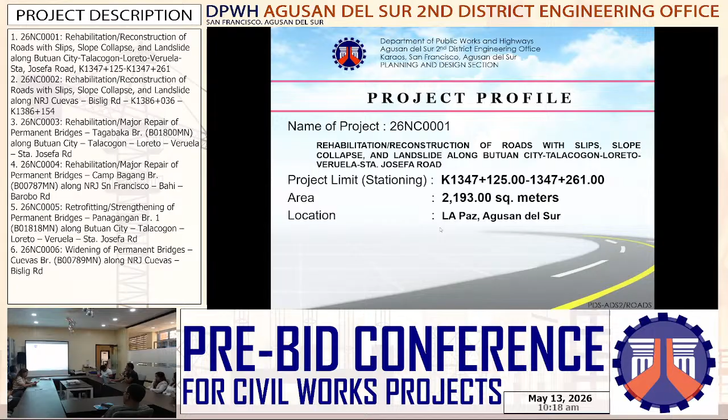It has an appropriation of 31,724,000 with an ABC of 31,089,520 pesos, with a total of 288 calendar days. Classification: slope protection, source of funds for 2026.

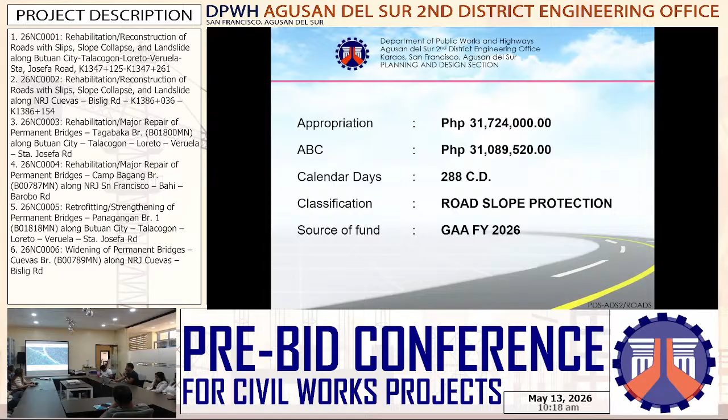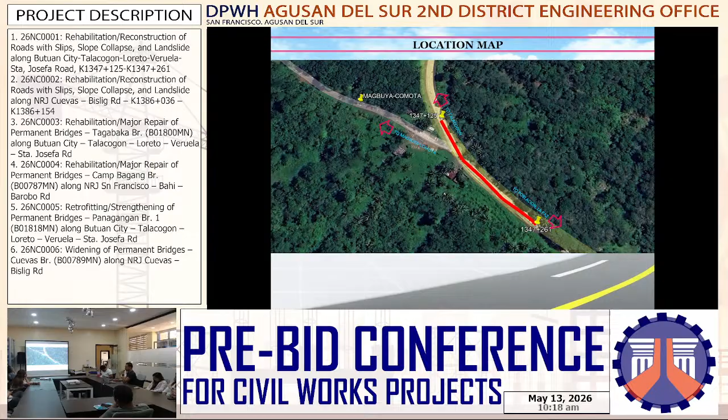So this is the location of the project. This way is leading to Talacogon and this way is to Poblacion La Paz. And this junction is to Magbuya-Comota.

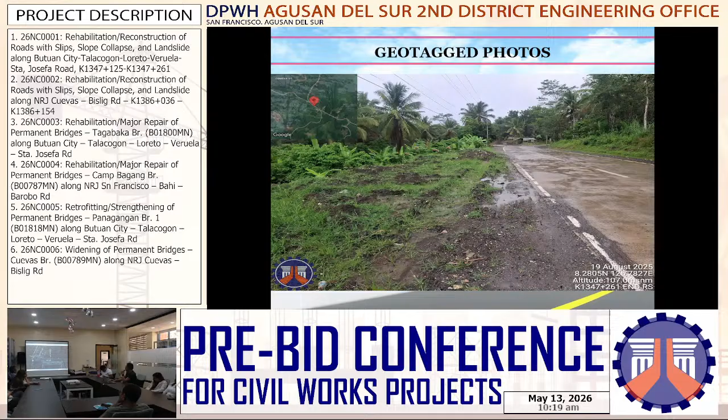These are the geotagged photos. So for the plan and profile, we have two sections. First section is at 1347 plus 125, the location is a one-berm slope protection, and it will end at 1347 plus 177.55. For the second location, the two-berm slope protection will be from 1347 plus 180 to 1347 plus 260.

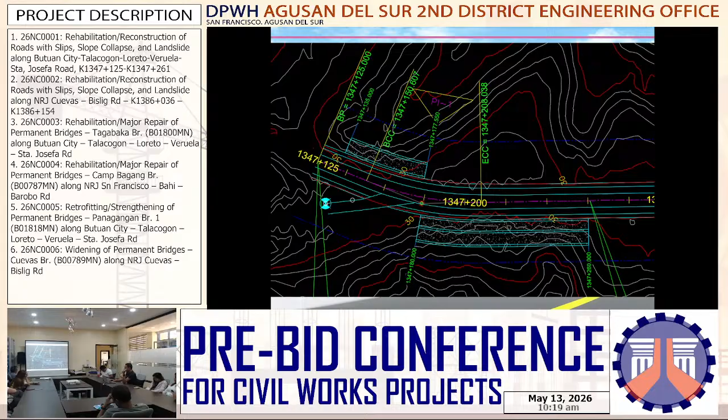So this is the typical section for reinforced concrete slope protection. We have the existing carriageway and the location of our slope protection at the left side will be offset at a distance of 5.35 meters away from the existing carriageway. So we are using reinforced concrete slope protection in this area.

We don't introduce steel sheet piles in this area, so we only have footing, for two berms with steel sheet piles for protection. It is offset at 5.35, and we're using U-piles with a length of 12 meters. These are the four sections.

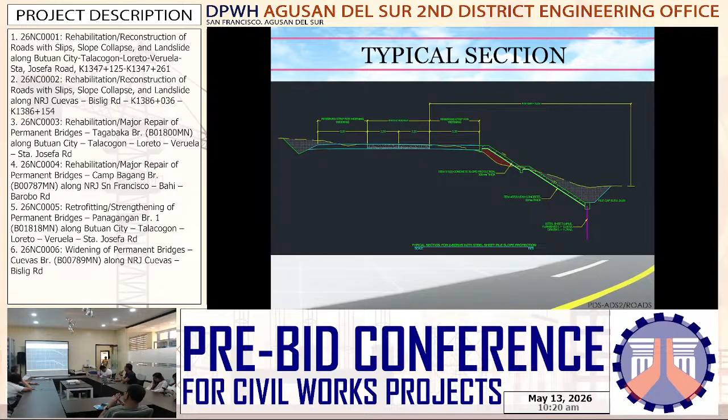So for the program of works, facilities for the engineer: construction of field office for the engineer, 1 lump sum. Provision of furniture, fixtures, equipment, and appliances for the field office for the engineer, 1. Under this item is 1 unit of desktop computer for administrative use, and a multi-function A4 printer.

Other general requirements: construction survey and staking, 0.136 kilometers; project billboard/signboard, 4 each; occupational safety and health program, 1; traffic management, 1 lump sum; mobilization and demobilization, 1 lump sum.

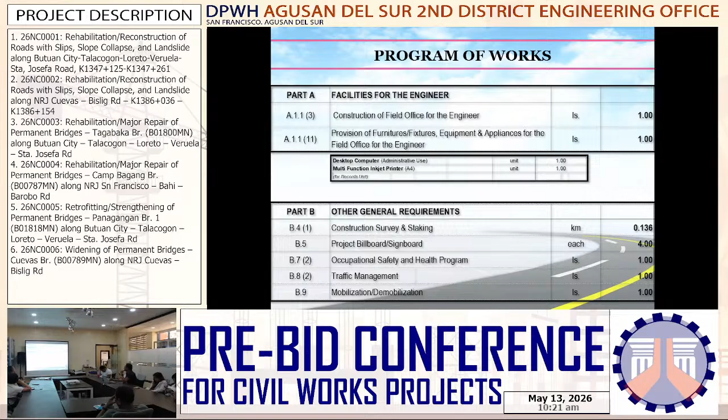For earthworks: surplus common excavation, 1,333.84 cubic meters; embankment from roadway/structure excavation, 429.9 cubic meters. Drainage and slope protection structures: structural steel sheet piles, furnish 2,400 meters, driven 2,340 meters. For reinforcing steel, 2,602.78 kilograms; structural concrete 20.68 megapascal Class A, 49.28 cubic meters.

And for the lean concrete, 63.16; concrete slope protection, 459.49 cubic meters. For miscellaneous structures, reflectorized thermoplastic pavement markings, white, 34.4 square meters.

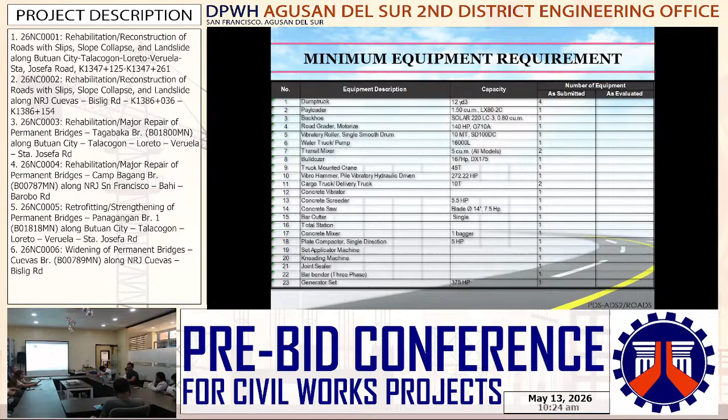So contract ID 26NC0003.

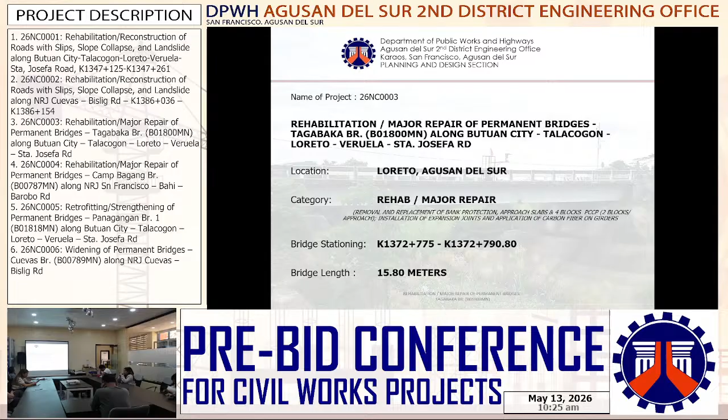Bridge stationing, kilometer 1372 plus 775 to kilometer 1372 plus 790.8, with bridge length 15.8 meters. Bridge type RCDG, number of span 1. Appropriation 7,840,000 pesos, with an ABC of 7,683,200 pesos. Project duration 106 calendar days. Source of fund GAA FY 2026 under Fisaro Schedule 1.

So for the bridge profile, Tagabaka Bridge was constructed in year 2015. The existing bridge has served the public for 11 years. For the location map of Tagabaka Bridge, this direction is going to Poblacion, Loreto, while this way is going to Binucayan, Loreto, and this direction is going to La Paz.

For the geotag, there are actual photos on site. We have here the beginning of the project and the end of the project. For the condition on site, as per latest BMS assessment, it has been observed that there's a settlement at abutment A with depth of 0.4 meters and abutment B, 0.15 meters. And also there's material loss on each side of abutments A and B, and there's honeycomb on girders near the abutment.

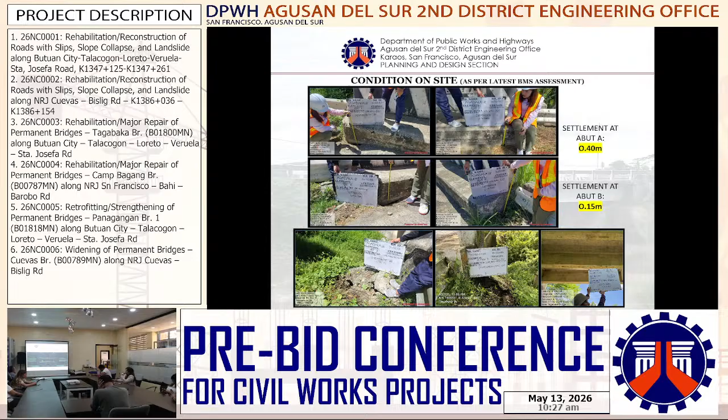So for the general plan of Tagabaka Bridge, part of this project is the removal and replacement of approach slabs A and B, and also there's an embankment underneath for the settlement issue. Then we also have the removal and replacement of PCCP, 6.7 by 4.5, also with embankment for approach A and B. We also have the installation of expansion joint finger type for A and B.

And under the bridge, we have the removal and replacement of damaged bank protection, 0.3 meter thick, with lean concrete 0.10 meter thick, 9 meters each side, or 18 meters per abutment. Note that all RSB from damaged structures subject for replacement will be turned over to the implementing office.

For the general elevation of Tagabaka Bridge, we have the installation of expansion joint finger type at A and B, removal and replacement of approach slabs A and B, PCCP 6.7 by 4.5 with embankment for settlement, carbon fiber sheet at both ends of girders, removal and replacement of damaged bank protection, and note this portion is the RC bank protection covering the abutment.

Be reminded that the RSB from damaged structures subject for replacement will be turned over to the implementing office.

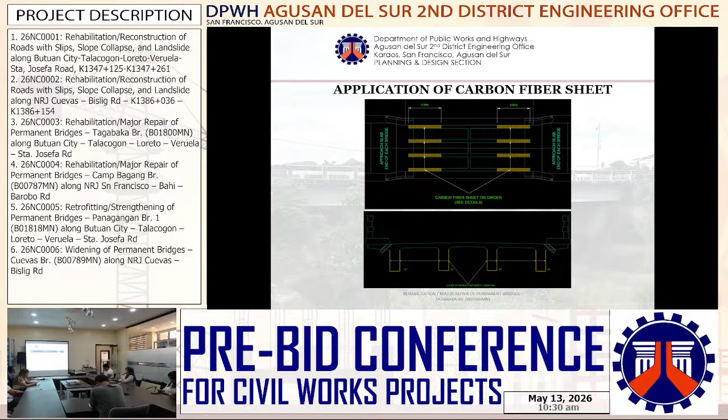For the program of work of Tagabaka Bridge: Part A, facilities for the engineer, provision of field office for the engineer on rental basis or bunkhouse rental, 4 months. Part B, other general requirements: bridge survey and staking 1 lump sum, project billboard and signboard 4 each, occupational safety and health program 1 lump sum, traffic management 1 lump sum, mobilization/demobilization 1 lump sum.

For Part C, earthwork: clearing and grubbing 0.144 hectares, removal of actual structure and obstruction 0.28 meter thick PCCP unreinforced, this is for the existing unreinforced PCCP, 60.3 square meters. For removal of actual structure and obstruction 0.3 meter thick or our existing approach slabs, 80 square meters.

For removal of structure and obstruction concrete, this is from the damaged bank protection, 64.8 cubic meters. For the embankment from borrow, common soil, this is for the settlement under the PCCP and also the access road leading to the bottom under the bridge, we have 307.24 cubic meters.

For Part D, sub-base and base course, we have item 200 under PCCP, 30.4 cubic meters. For Part E, surface courses, PCCP unreinforced 0.28 meter thick, 60.3 square meters; for PCCP 0.3 meter thick, 80 square meters.

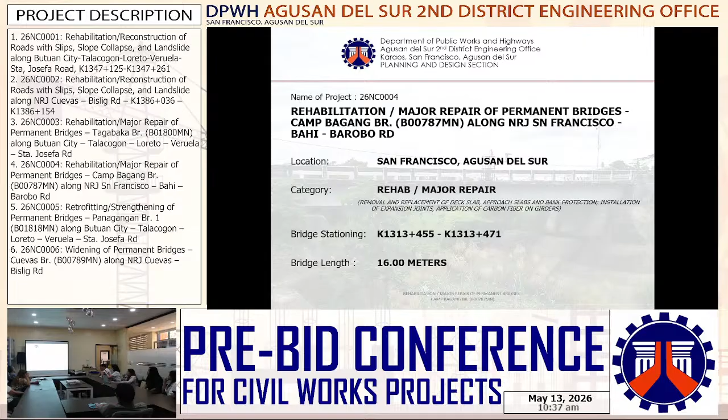Bridge length of 16 meters. Bridge type RCDG, number of span 1, appropriation 9.8 million, ABC of 9,604,000 pesos. Project duration of 109 calendar days. Source of fund, GAA FY 2026 under Fisaro Schedule 1.

For the bridge profile of Camp Bagang Bridge, it was constructed in 1981, repaired and rehabilitated in 2014 by the maintenance section, and widened under GAA 2025 at both sides. So the existing bridge has served the public for 45 years already.

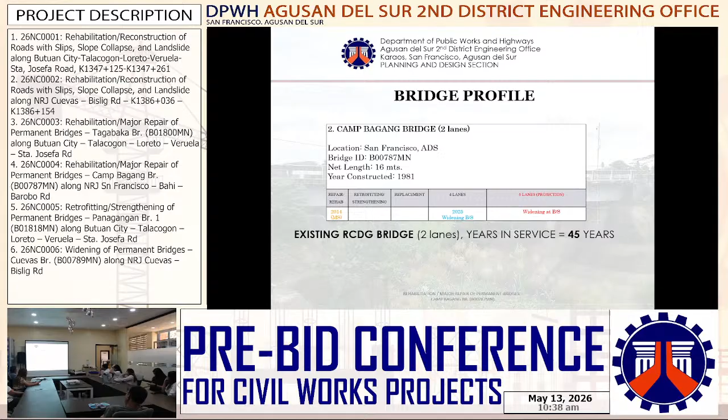For the location map, this is the Camp Bagang Bridge. This way is going to Barobo and this way is going to SF Rotonda. This is SF Rotonda.

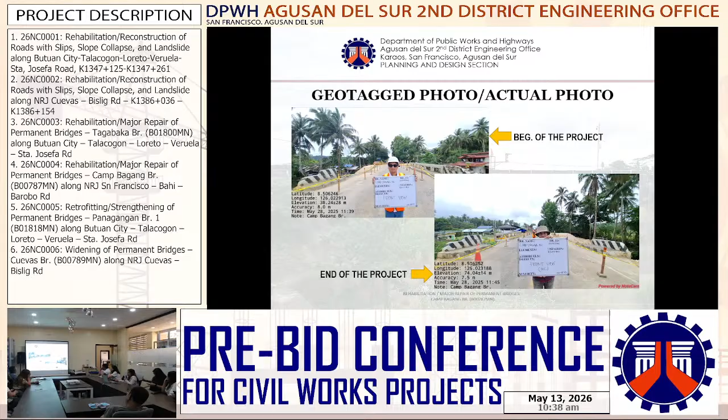For the geotag photo and actual photo on site, this is the beginning of the project and the end of the project. For the condition on site, as per latest BMS assessment, it has been observed that there's scaling in the approach slabs and also deteriorated sealant at abutments, expansion joint water leakage, damaged bank protection, scaling at the whole deck, and bar exposure at G1 near the abutment.

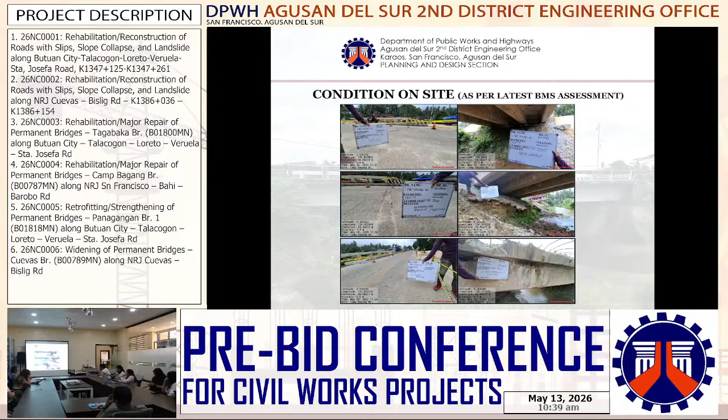So for the general plan of Camp Bagang Bridge, part of this project is the removal and replacement of the whole deck and also the approach slabs A and B, installation of expansion joint at A and B, and we have under the bridge RC bank protection of 0.3 meter thick with lean concrete 0.10 meter thick, RC footing 0.4 by 1.5. Distance covered is 8.5 at A and B - this is just the gap in between the widened left and right side.

For the general elevation of Camp Bagang Bridge, note that the post railings and sidewalks of the existing two lanes, or the inner lanes, were already removed as part of the FY 2025 widening of the bridge at both sides. So for the rehab, we have removal and replacement of deck slab of the inner lanes only, then application of carbon fiber wrapped on our girders at both ends.

Then we have the installation of expansion joint, finger type, at A and B, then removal and replacement also of the approach slabs A and B. Then under the bridge we have the RC bank protection to the inner lanes, 0.3 meter thick with lean concrete 0.10 meter thick. Note: all RSB from damaged structures subject for replacement will be turned over to the implementing office.

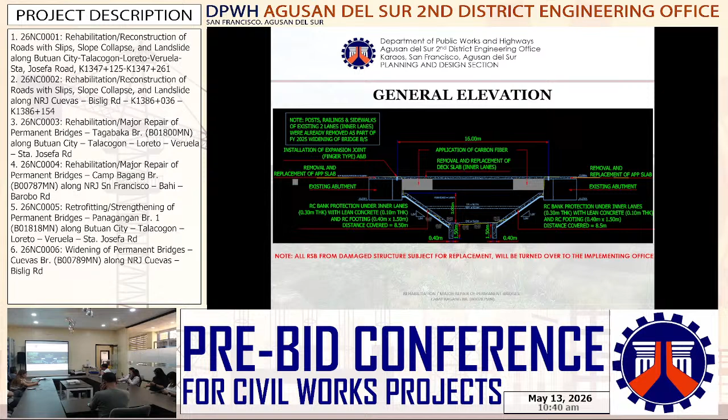For the bank protection details, we have RC bank protection 0.3 meter thick, lean concrete 0.10 meter thick with weep holes, RC footing of 1.5 by 0.4, altitude of 3 meters, ratio of 1:1.5.

For the RSB schedule, we have 16 mm diameter for the horizontal bars, spaced at 0.4, and for the vertical bars we have 12 mm diameter. For the RC footing, we have 10 pieces, 16 mm diameter for the horizontal bars, and 12 mm diameter for the vertical bars, spaced at 0.4. Note 50 mm concrete cover. So distance covered of the bank protection is 8.5 per abutment.

Part of this project is also the installation of transverse expansion joint at A and B, specifically installed in between the approach slab and the deck slab.

So for the approach slab, this is the 4 lanes orientation. This is the widened approach slab under GAA FY 2025. So we will just remove and replace the inner approach slabs.

We also have the application of carbon fiber - carbon fiber sheet, 2 layers, wrapped on girders at both ends with length of 3.8.

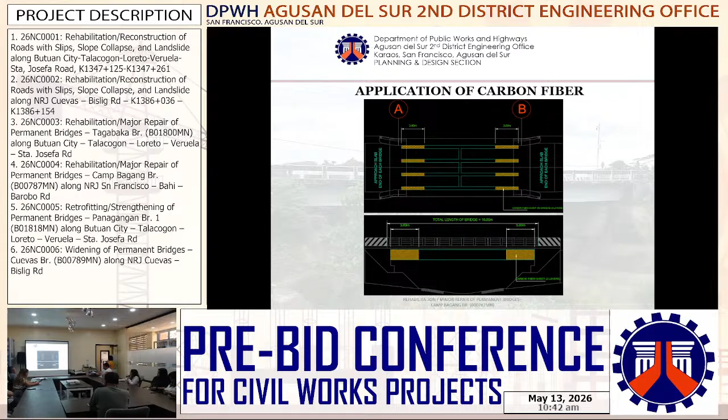This is the girder, wrapped in 2 layers of carbon fiber sheet, 1.2 mm thick, length of 3.8.

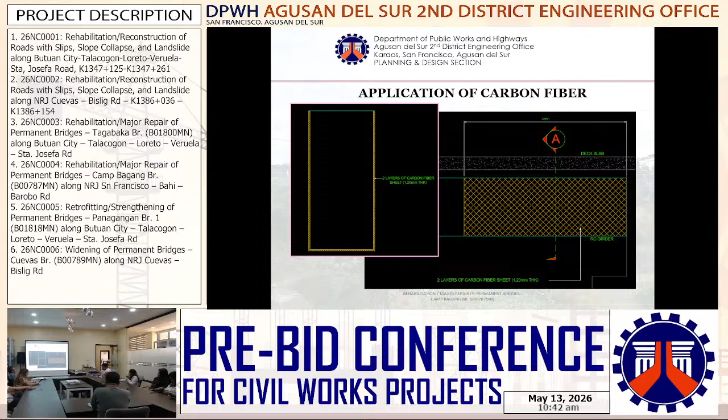So for the program of work of Camp Bagang Bridge, we have Part A, facilities for the engineer: provision of field office for the engineer, rental basis or bunkhouse rental, 4 months. For Part B, we have bridge surveillance 1 lump sum, project billboard and signboard for each, occupational safety and health program 1 lump sum, traffic management 1 lump sum, and mobilization 1 lump sum.

For Part C, earthwork, we have removal of actual structures and obstruction, 0.3 meter thick PCCP reinforced, 80 square meters. For removal of structures and obstruction concrete, this is for the deck slab and damaged bank protection, 35.42 cubic meters. For the embankment from borrow, common soil, this is under the bridge for bank protection and also the transition for detour purposes.

1,167.4 cubic meters. And for Part D, sub-base and base course, we have item 200. This is under approach slabs and the detour surfacing, 96 cubic meters. And for surface courses, we have PCCP 0.3 meter thick, 80 square meters.

For Part F, we have reinforcing steel grade 40, this is for the deck slab and RC footing, 472.94 kilograms. For reinforcing steel grade 60, for the deck slab, we have 13,899.54 kilograms. For the structural concrete, 20.68 MPa, we have 10.2 cubic meters.

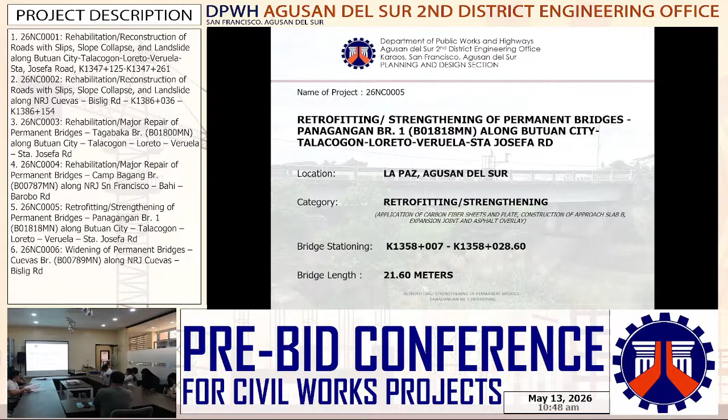With specifics: application of carbon fiber sheets and plate, construction of approach slab B, expansion joint, and asphalt overlay. Bridge stationing, kilometer 1358 plus 007 to 028.6. Bridge length, 21.6 meters. Bridge type, PCDG, number of span 1, appropriation 9.8 million, ABC of 9,604,000 pesos. For the project duration, we have 109 calendar days.

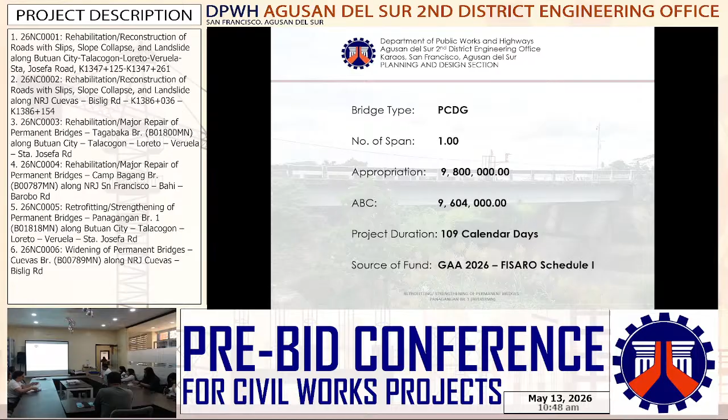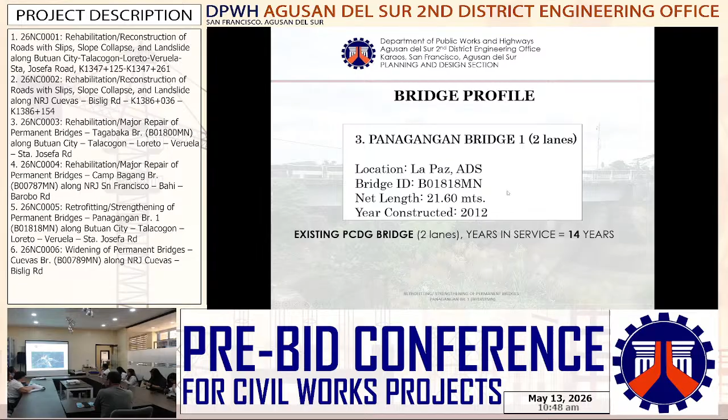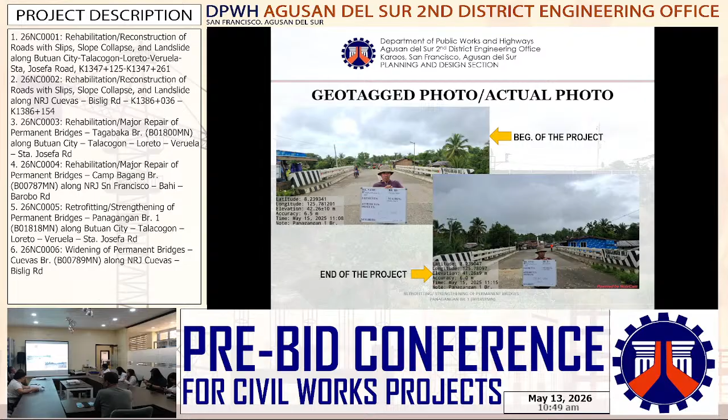For the geotagged photo or actual photo on site, the beginning of the project and the end of the project. For the condition on site, as per latest BMS assessment, it has been observed that there's scaling for the whole deck, there's no approach slab at abutment B, and there's honeycomb on inner girders.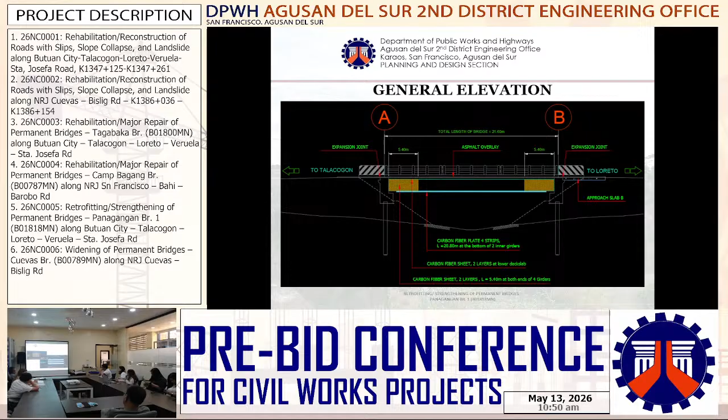So for the carbon fiber again, we have here the carbon fiber sheet 2 layers at the bottom of the deck slab in grid form. So here's the detail. For the longitudinal, 200 mm by 20,800 mm by 1.2 mm thick, this portion. Then for the transverse, we have 200 mm by 1,200 mm by 1.2 mm thick, this.

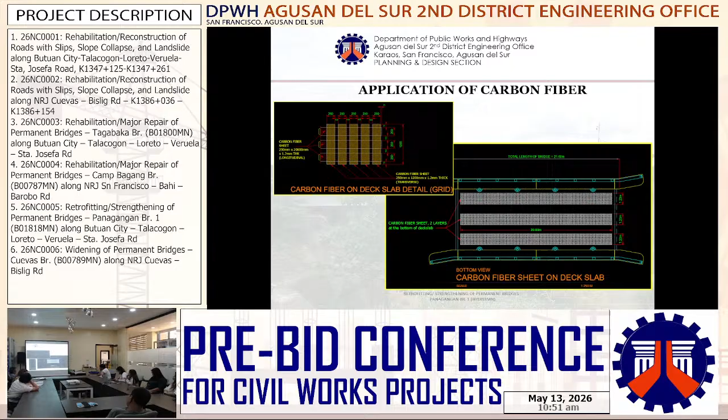Again, from the previous slide, the deck slab in grid form na carbon fiber sheet. Also, we have the 2 layers carbon fiber sheet on girders at both ends. Then we also have the 4 strips carbon fiber plate for inner girders only.

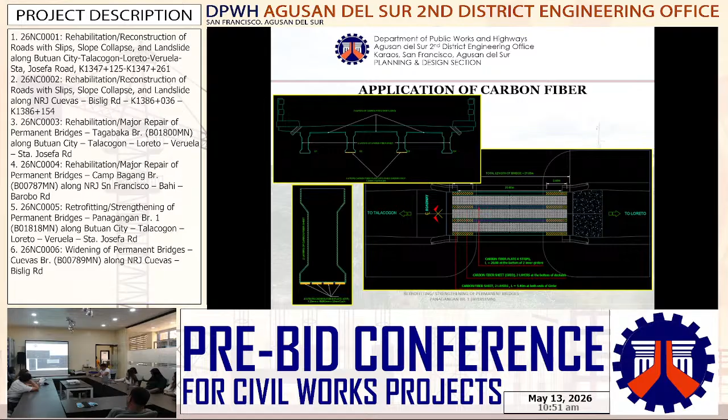So part of this project also we have the transverse expansion joint finger type at A and B.

So for the program of work, Part A, facilities for the engineer: provision of field office for the engineer on rental basis, the bunkhouse rental, 4 months. For other general requirements: bridge survey and staking, 1 lump sum; project billboard signboard, 4 each; occupational safety and health program, 1 lump sum; traffic management, 1 lump sum; move and demove, 1 lump sum.

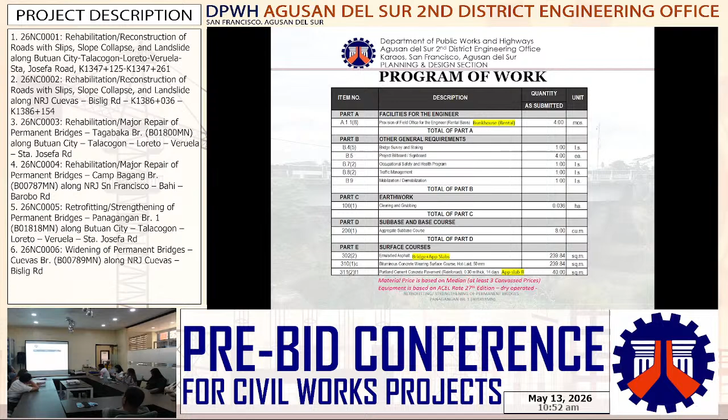For the earthwork, we have clearing and grubbing, 0.036 hectares. For the sub-base and base course, we have aggregate sub-base course, 8 cubic meters, under approach slab B. Then for the surface courses, we have emulsified asphalt, 239.84 square meters, and bituminous concrete wearing surface course hot plant mix, 50 mm, 239.84 square meters also. We also have the PCCP, 0.3 meter thick, 40 square meters.

For the bridge construction, part F, we have paint for the concrete structure, 73.79 square meters. For the expansion joint, 14.80 linear meters. We also have the forms and false work in support for the application and installation of carbon fiber, 1 lump sum. We have carbon fiber sheet 2 layers, 272.3 square meters. For the plate, we have 8.32 square meters.

For the miscellaneous structures, we have reflectorized thermoplastic pavement markings white, 6.32 square meters, and for the yellow, we have 9.48 square meters. So again, material price is based on the median of at least 3 canvassed prices.

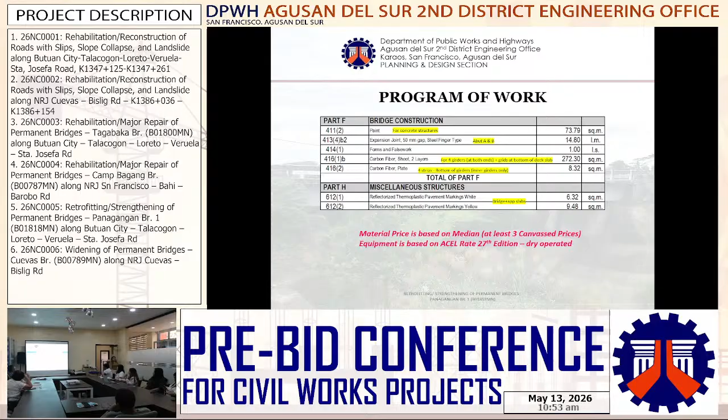Equipment rate is based on ACEL rate 27th edition. But since this is located at La Paz, it falls under dry-operated. Again, the DOE fuel price for the specific week is used. So dry-operated meaning the equipment rate is computed through dry-operated plus fuel plus lubricant.

For the quarry sources, the sand will be from Patrocinio, Santa Josefa, with hauling distance of 60 kilometers away from the project site. Our gravel crush will be from Simula River Quarry, San Ignacio, Trento, with hauling distance of 76.5 kilometers away from our project site. The cement will be from this office, 67 kilometers to our project site. The RSB will be from Davao City with hauling distance of 209 kilometers to our project site.

For the minimum equipment requirement, we have bulldozer 1, dump truck 2, payloader, vibratory roller, water truck, asphalt distributor, boom truck, asphalt paver, pneumatic tire roller, tandem steel roller, cargo truck, kneading machine, applicator machine, air compressor, generator set, grinding machine with accessories, 1 unit.

That's all, sir, for Panagangan Bridge 1. Thank you. Any questions, clarifications for retrofitting of Panagangan Bridge? Hearing none, we'll proceed to the next project.

26NC0006, widening of Cuevas Bridge.

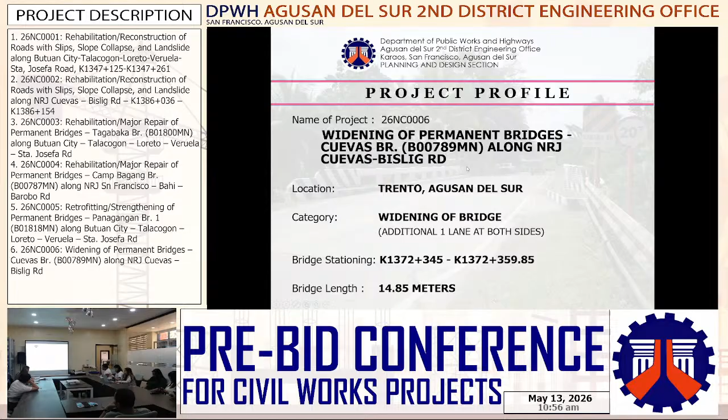Appropriation 24,173,000 pesos. For the ABC, 23,689,540 pesos. Project duration, 240 calendar days. Source of fund, again GAA 2026, under FISARO Schedule 1.

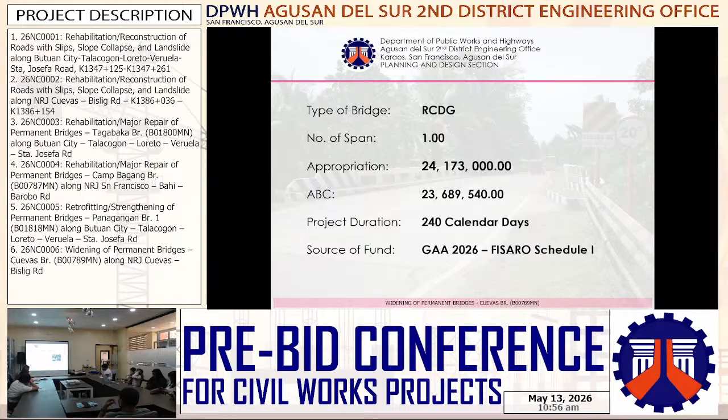Bridge profile of Cuevas Bridge: it was constructed in 1997. It was repaired and rehabilitated by the maintenance section in 2024. So it has served the public for 29 years already.

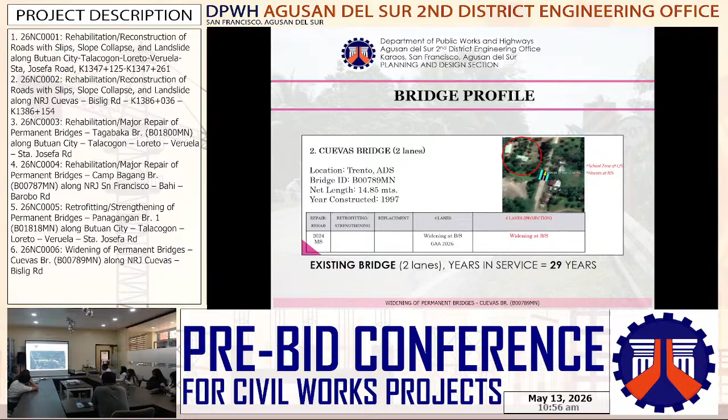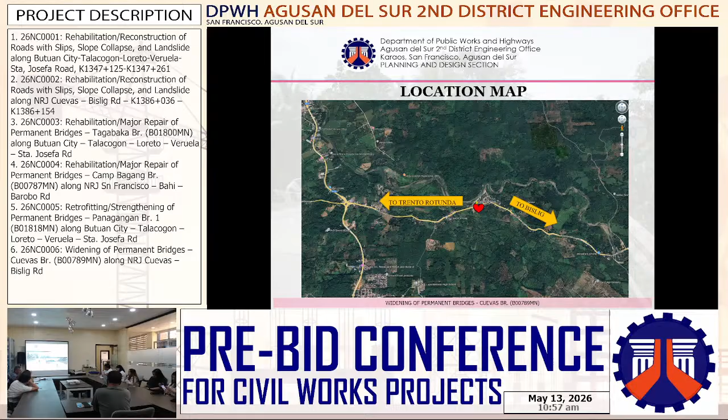For the general plan, we have here the existing RCDG bridge, the center line. So our project is widening at both sides, meaning 1 lane on the left and 1 lane at the right side.

Under the bridge, we also have the RC bank protection with SSP, length of SSP 3 meters, distance covered of 18 meters each side or 36 each abutment. We also have the transition access road leading to the construction site, also grouted riprap with end protection works.

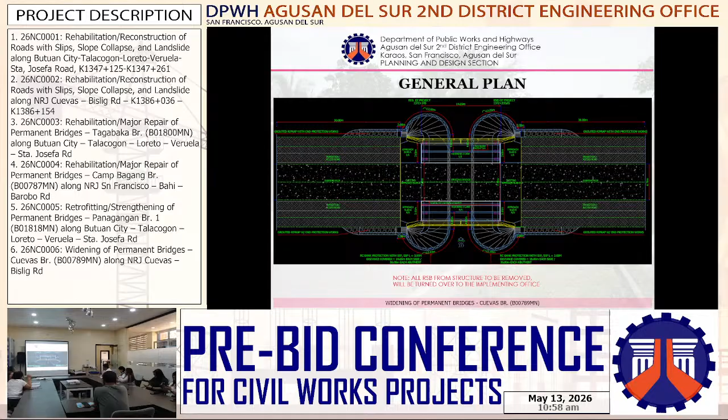For a closer look, showing you one side only at the right side: widening one lane, deck slab, the approach slab. Then under the bridge, we have the RC bank protection.

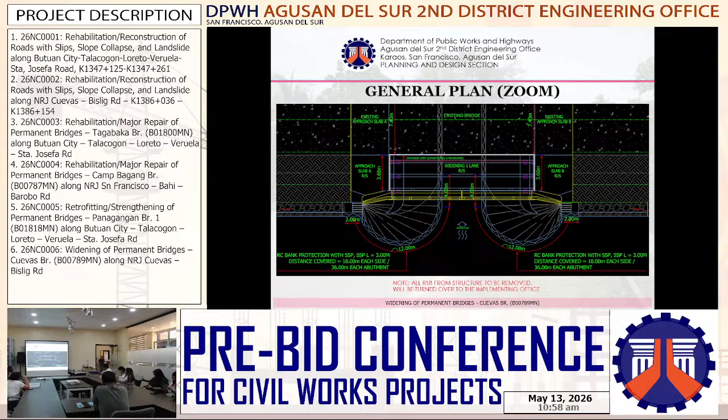For the general elevation of Cuevas Bridge, we have here the bridge with length of 14.85 meters. At abutment A, we will drive precast concrete pile, 400 by 400 mm, length of 20 meters, number of piles to be driven 12 pieces, with actual capacity of 1,463 kilonewton. At abutment B, same size but length of 18 meters, number of piles also 12 pieces.

And actual capacity of 1,732 kilonewton. Under the bridge, we have the RC bank protection with driven SSP, length of steel sheet pile 3 meters, distance covered 18 each side or 36 meters per abutment. Note that all RSB from structure to be removed will be turned over to the implementing office.

We also have the transition leading to this side for the widening, 30 meters.

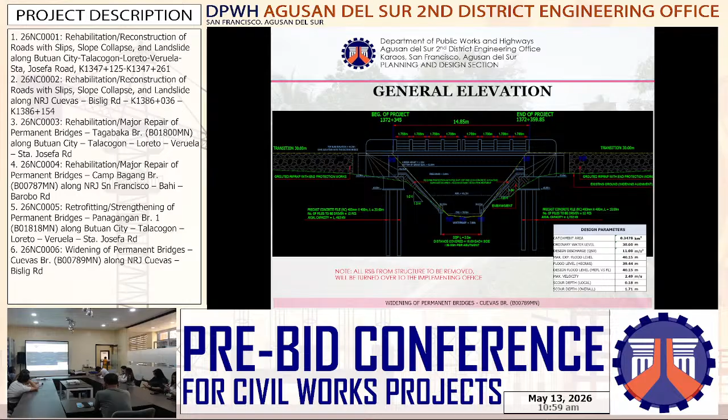For the typical cross-section, we have here the existing abutment, and this is our proposed abutments, widened at both sides. Embankment and grouted riprap as protection.

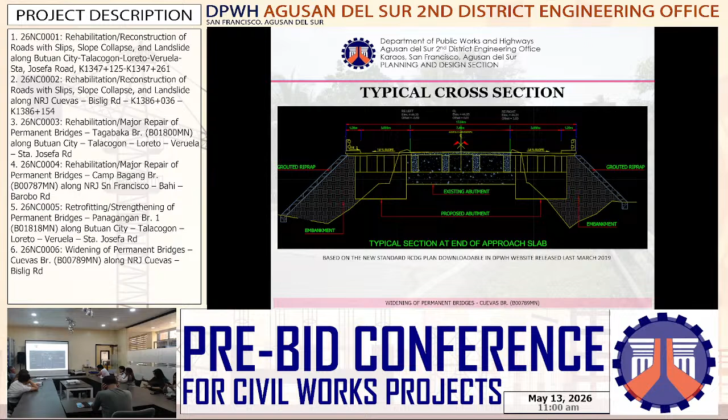For the section view of the foundation layout, we have here the existing abutment, then existing driven piles. This portion is to be chipped off. Then we will drive the RC pile for the widening, spaced at 1.0.

Then at the top, we have the girders, RCDG, 3 spaces at 1.45 or 1,450 mm. So this is the existing one lane portion, then this is the widening at one lane, one side only.

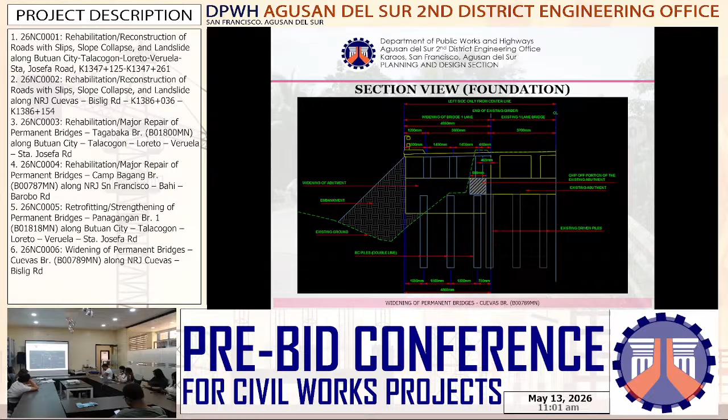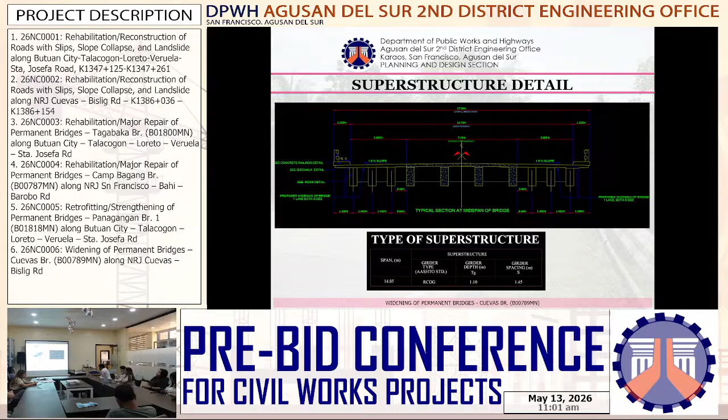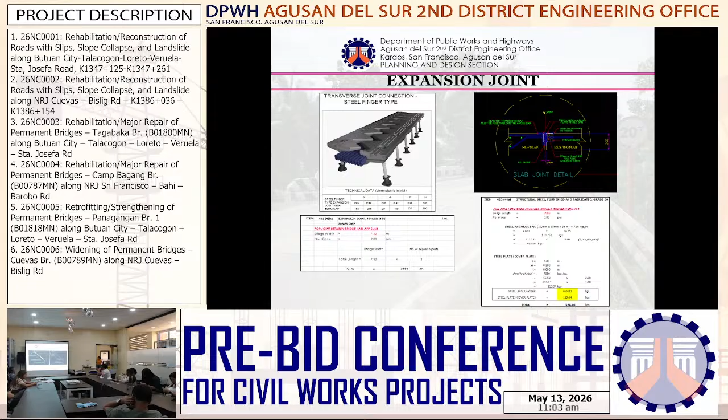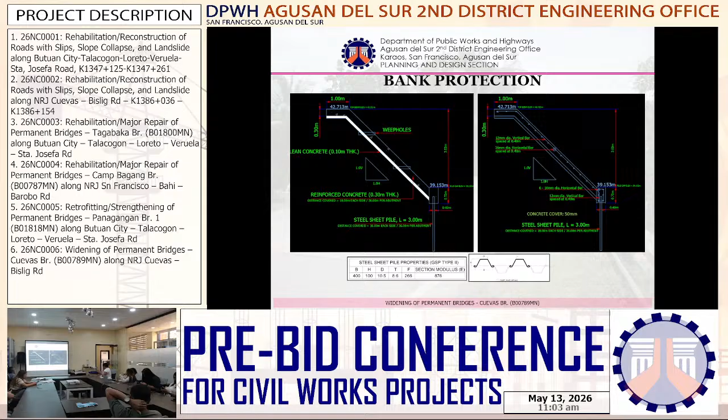For the RSB schedule, we have 12 mm diameter for the vertical bars, spaced at 0.4, and 16 mm diameter for the horizontal bars. For the pile cap, 6 pieces, 16 mm diameter horizontal bar, and 12 mm diameter vertical bar, spaced at 0.4. Steel sheet pile again 3 meters, distance covered for the bank protection is 18 meters each side or 36 meters per abutment. For the steel sheet pile properties, type 2.

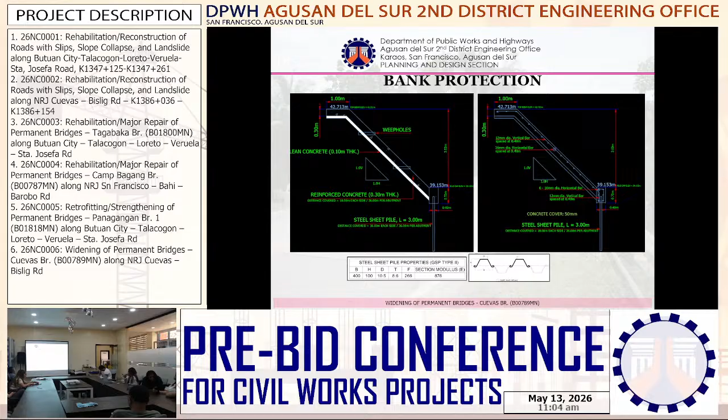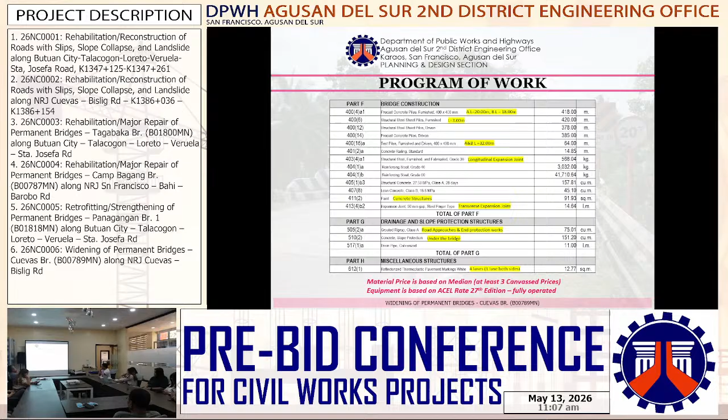For the miscellaneous structures, reflectorized thermoplastic pavement markings, 12.77 square meters. So for this project, since this is located at Trento, nearest to Trento under DOE is San Francisco, so this will fall under fully operated.

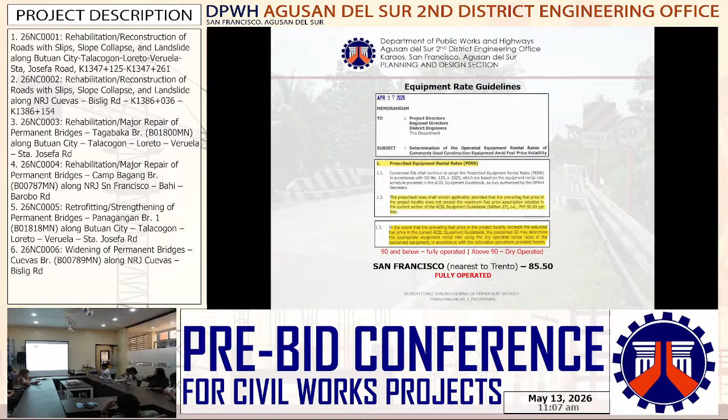So San Francisco rate is 85.50, so below 90 pesos, fully operated.

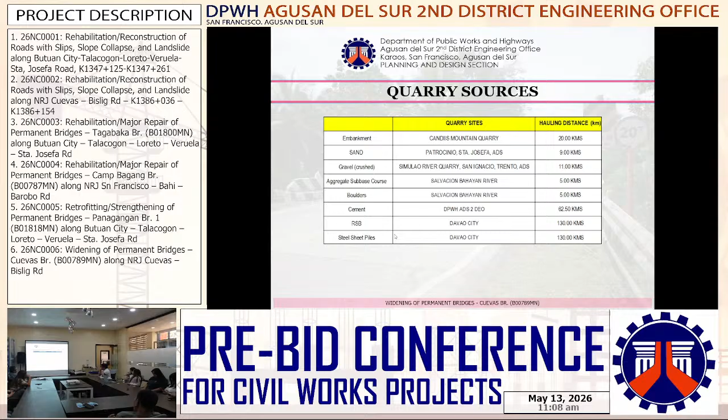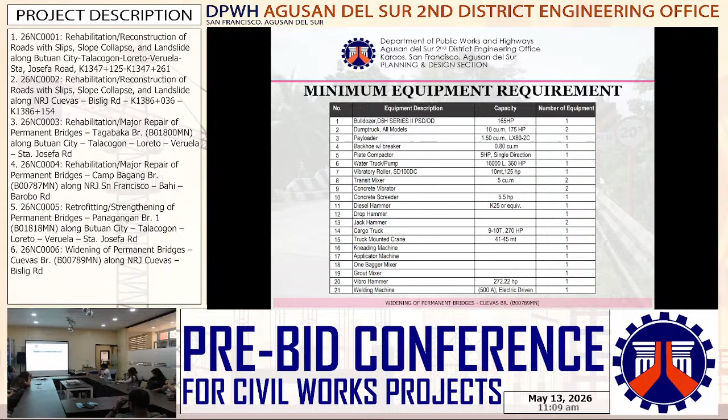For the minimum equipment requirement: bulldozer 1 unit, dump truck 2 units, payloader, backhoe with breaker, plate compactor, water truck, vibratory roller 1 unit. Transit mixer, concrete vibrator 2 units, concrete screeder, diesel hammer, drop hammer 1 unit, jack hammer 2 units, cargo truck, truck mounted crane, kneading machine, applicator machine, 1 bagger mixer, grout mixer, vibro hammer, welding machine 1 unit. That's all, sir, for Cuevas Bridge.

Thank you. Any questions, clarifications for the widening of Cuevas Bridge?

Okay, none. So, by the way, all projects located in La Paz or Loreto, equipment rental rates are dry operated. Proceed for the next project.

26 NC002. Cuevas Bislig.

Good morning, everyone. This is for the rehabilitation or reconstruction of roads with slips, slope collapse, and landslide along NRJ Cuevas Bislig Road, K1386 plus 036 to K1386 plus 154, with a type of work of construction of road slope protection structure, target area of 2,242 square meters located at Agusan del Sur, with an appropriation of 37,663,000 pesos, an ABC of 36,909,740, and a project duration of 292 calendar days under GAA FY 2026 as source of fund.

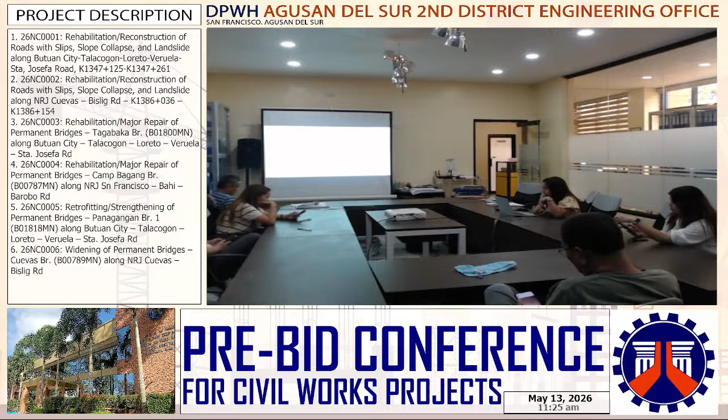Bids must be duly received by the BAC Bids and Awards Committee Secretariat through manual submission at the address indicated below or online electronic submission at electronicbid@agusandelsur2@dpwh.gov.ph on or before May 26 at or before 1 o'clock in the afternoon. Late bids shall not be accepted.

All bids must be accompanied by a bid security in any of the acceptable forms and in the amount stated in the invitation to bid clause 16. Bid opening shall be on May 26, 2026 at 1 o'clock p.m. at BAC Conference Room, DPWH Agusan del Sur, 2nd DEO, Barangay Carao, San Francisco, Agusan del Sur.

For the bid detail sheet, for contract ID 1 and 2, the major category of work code RCSPS, work description: roads, construction, road slope protection using structural measures, revetment, retaining structures, rock netting, concrete crib, shotcrete, MSE walls, gabions, riprap, masonry.

For contract ID 3 and 4, the major category of work code BRHCWOP, work description: bridges, rehabilitation, concrete, superstructure without piles. For contract ID 5, the major category of work code BRTCWOP: bridges, retrofitting, concrete, superstructure without piles. For contract ID 6, the major category of work BCCDP, work description: bridges, construction, concrete, superstructure with driven piles.

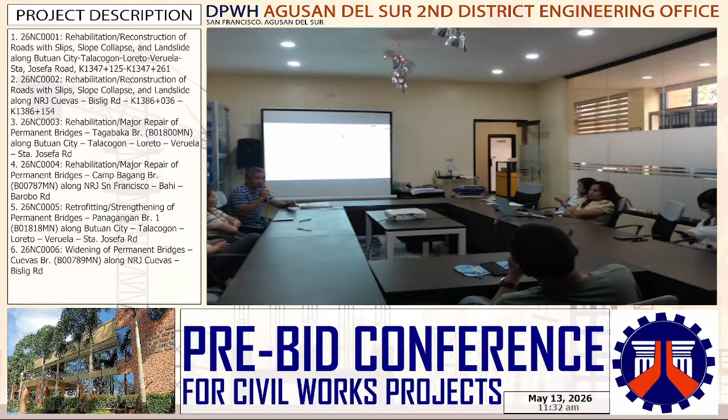This is also a reminder from the Commission on Audit, that they track all your ongoing projects for the computation of your NFCC.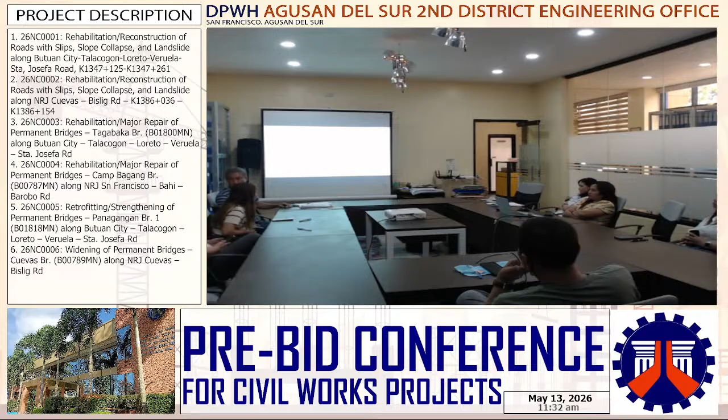And for the materials to be included in the project, regarding our gravel, it must be crushed as per the memo instructing crushed aggregate to be used, since here in Agusan it is recommended that crushed aggregate be used.